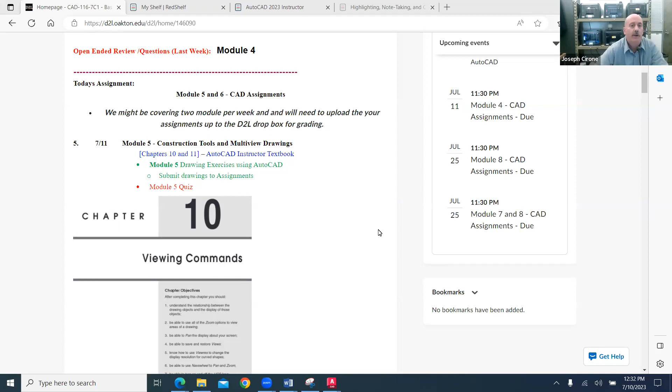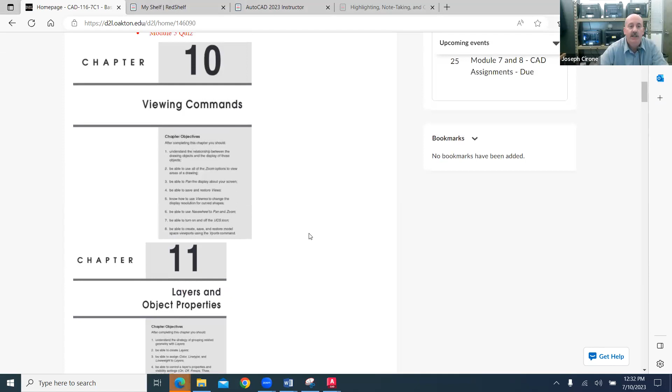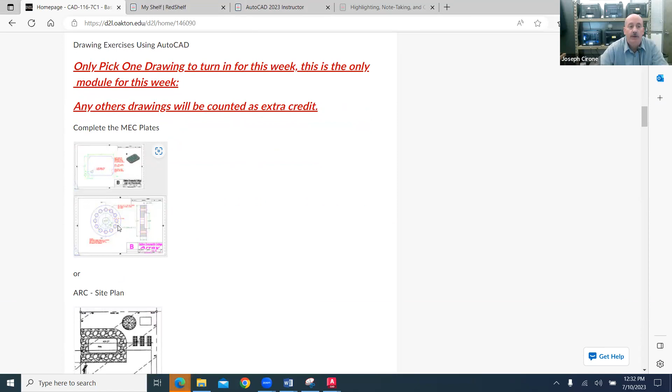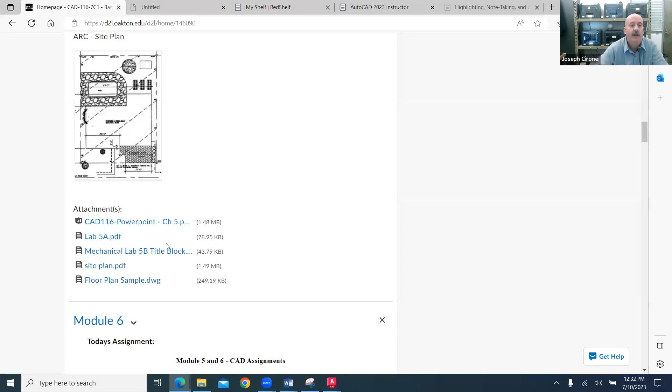Today we're going to look at Module 5, which covers Chapter 10 and Chapter 11 from our textbook. So we're going to take a look at those textbook chapters. I've also included in the main splash page the drawing assignment. You're to choose one drawing assignment, either one of these two mechanical drawings or this civil drawing. And then we have some attachments here for downloads. I've set this attachment here that'll allow us to take a look at an example that we can use for the chapter. So I'm going to download this file right here and open it.

And we have this floor plan sample that toggles with the textbook chapter. As we open that in AutoCAD, we can see that, and we can start to set up and take a look at our tabs.

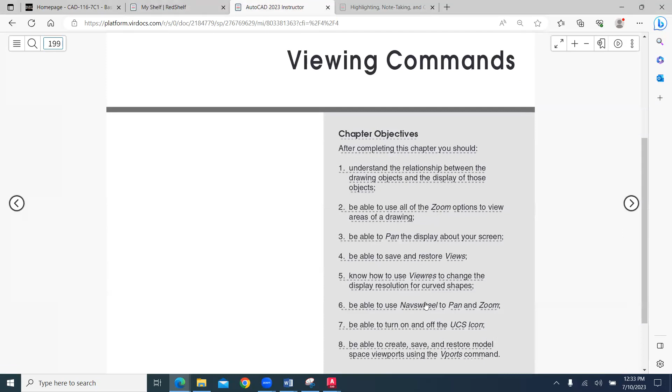We look at the chapter. We're looking at understanding the relationship between drawing objects in the display using zoom commands, pan commands, view resolution, navigation wheels. There's a lot of different ways to do things. User coordinate systems, and then being able to save and restore viewports.

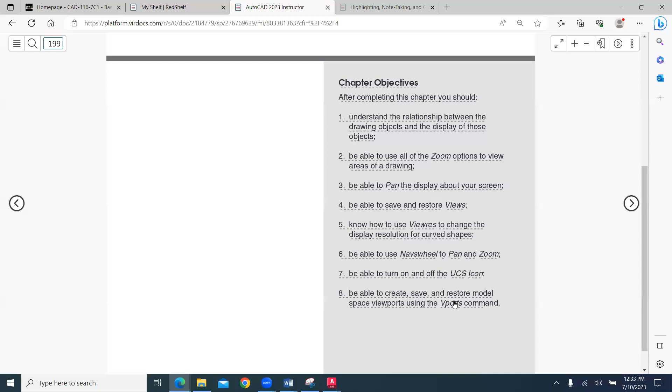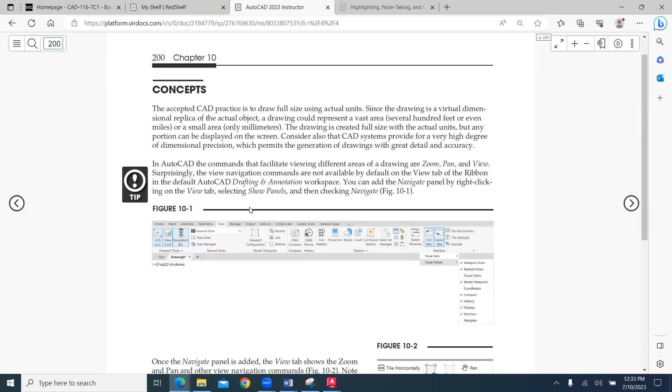The basic concept is that we create these full-size drawings that are scaled to actual units, and then we're able to see them on the CAD system. So when we look at these different drawings and we open them up, we can use the navigate panel to go through these different display commands.

So we can go to the main splash page and open this floor plan sample drawing, just as an example. Here's our floor plan sample drawing. Let's see if we can get this to fit on the screen.

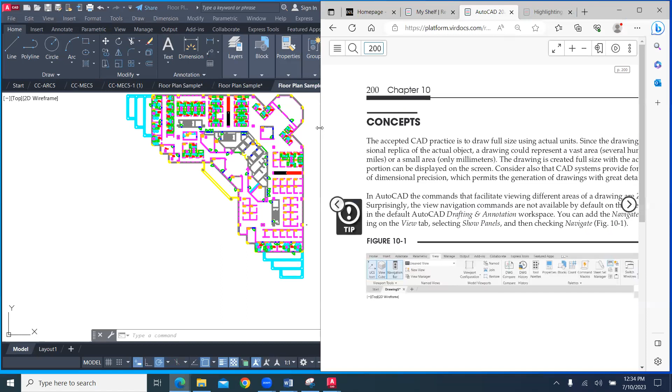So as we look at our sample drawing, the concept is that we would create the drawing full size. And if we were to go back to our CAD system, we can then check our units.

Let's enable our toolbar. So here's the menu bar. If I turn off the menu bar, show the menu bar, we'll have this menu bar here across the top. For example, if we wanted to check the format of this and we wanted to look at the drawing units, we could see that this is an architectural drawing, and the units would then be set up in feet and inches.

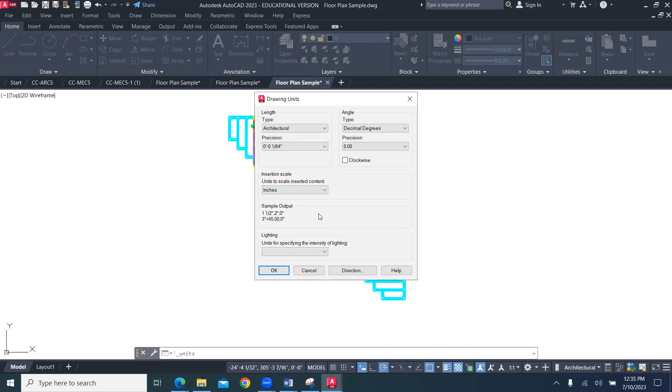We can check the navigation panel and then make sure that we have these different commands active. And that's part of getting to use AutoCAD.

And so when we look at the tabs, we have a home tab, an insert tab, an annotate tab, and a view tab. If you don't have one of those tabs on, what you do is you right click in an area and then you check to see that you have those tabs enabled. So we have our home tab, our insert tab, our annotate tab, home, insert, annotate.

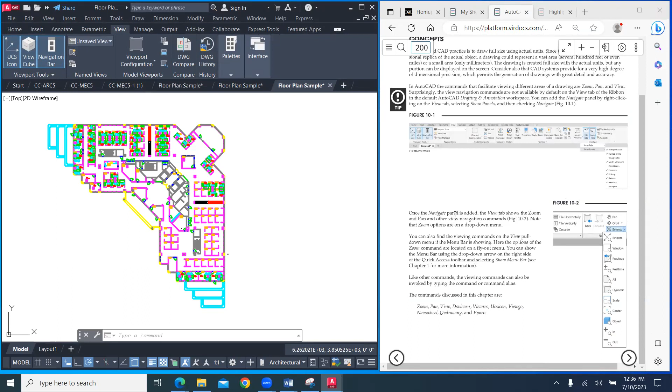And then when we're on the view tab, what we want to do is we want to make sure that we have the same tabs that are active. What they're showing here is on the tab that they have the navigate panel enabled. So to enable the navigate tab, what you do is you right mouse click and then you say show tabs, show panels, and make sure that navigate is checked off.

So now that navigate is checked off, you can then see these different commands like extents, window. Zoom extents will zoom everything that's within the drawing. Zoom window, we could use to create a little box and then zoom in on that window.

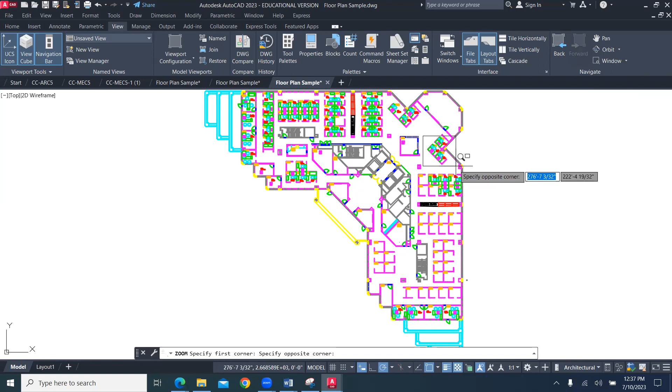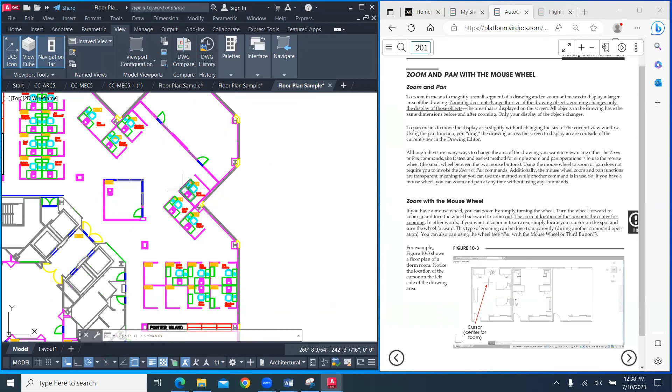The best way to zoom and pan is with the mouse. What you really want to do is get a mouse with a scroll wheel, so that'll allow you to change the zooming by just turning the wheel. They give you an example of how to zoom into a different area. So if you were looking at the floor plan, if I turn the wheel on the mouse, it'll zoom it out. If I push the wheel, it will zoom it in. It's extremely efficient to be able to go and look at the different areas of the drawing.

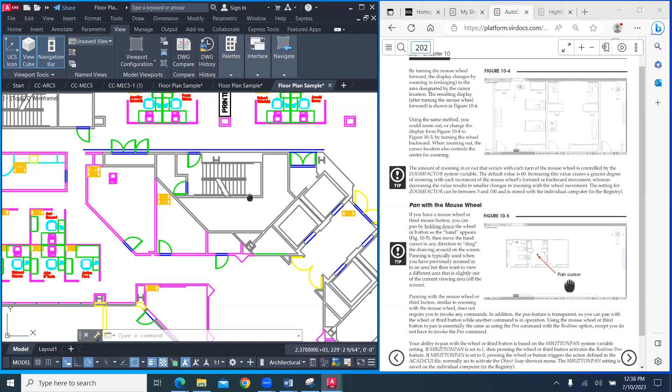If we wanted to pan with the mouse, what we do is we push the middle mouse wheel and you get the hand, and it'll allow you to look around the drawing without changing the level of magnification. So you can either be in really close and then pan around and see all these different cubicles that they have set up, or you can be farther back and look at more of the drawing.

AutoCAD has many different zoom commands, and it's a very well-established piece of software. As it developed over time, they added more and more different ways to view drawings.

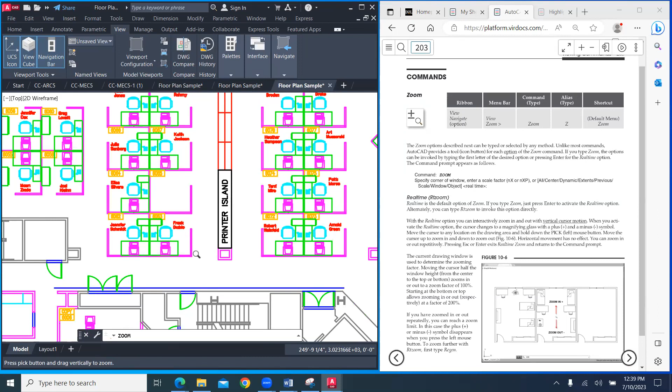Zoom real time uses the mouse to increase or decrease magnification. If you look at the view menu and select zoom real time, clicking and holding while pushing the mouse up increases the magnification level, in case you don't have a scroll wheel, or pulling down decreases it. That's real-time zooming, and it's really the best way to work with AutoCAD.

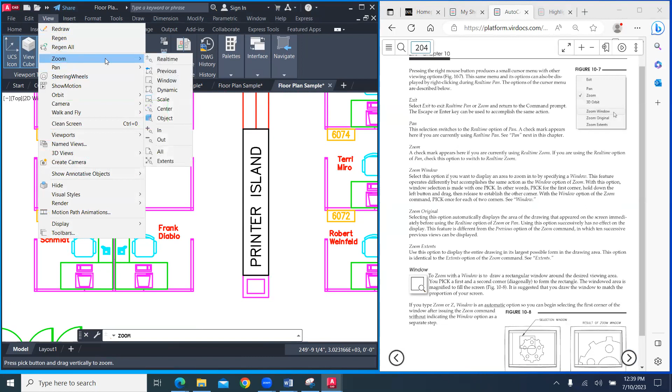Then you have things like zoom window, which is under view, zoom, window. You create a window and zoom in on that detail. You can get extremely small or extremely large as you zoom in.

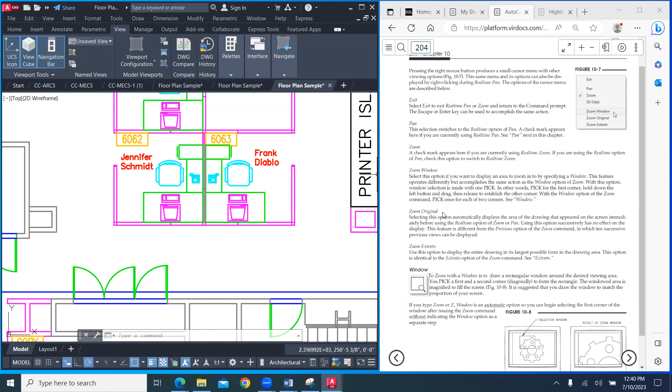You can exit out, right-click within the zoom commands, and use others like zoom window, zoom original, and zoom extents. If you go to view, zoom, extents, what you really want to use is zoom extents and zoom all, which give you the full perspective of what's available within the drawing.

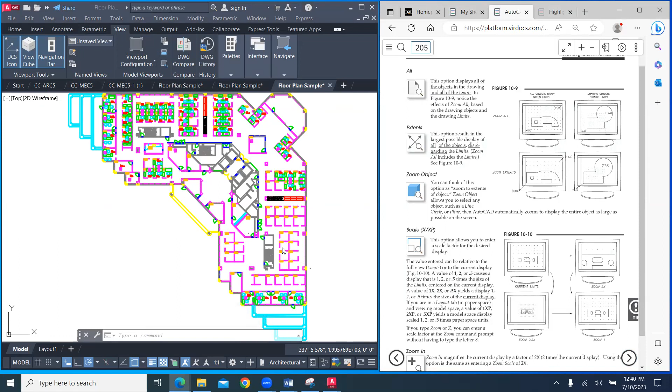You can also zoom in on objects at a set scale, but you don't really use that command so much as you would set up a viewport. It's just a command that allows you to set the display at a certain percentage.

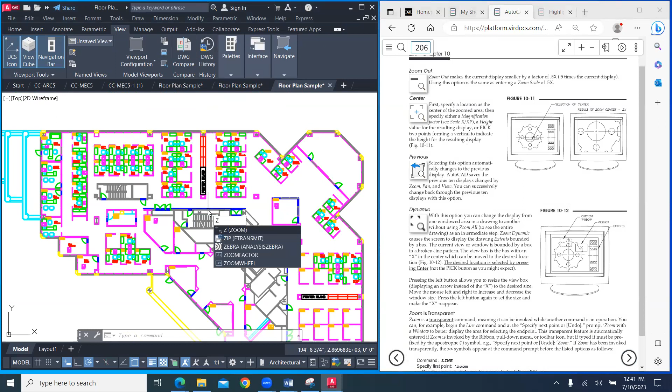Continuing through these zoom commands, there's also zoom previous. So if I was zoomed in here and then zoomed back, I could type Z for zoom and then P for previous, and it'll restore to that last zoom level.

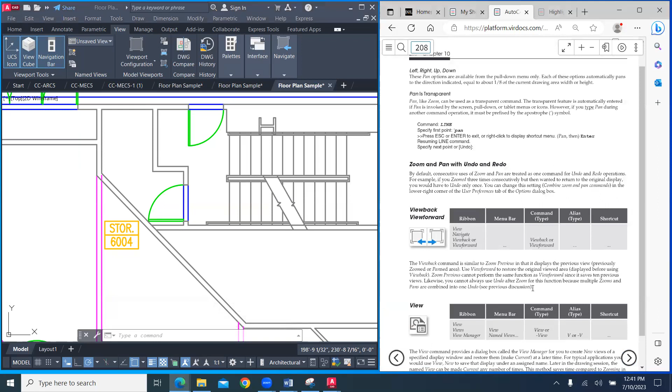You're able to use all these different zooming and magnification commands, but they pretty much all work the same. As you get into drawings, it's just a matter of navigating your way around and finding things, like in this floor plan, which may be fairly complicated.

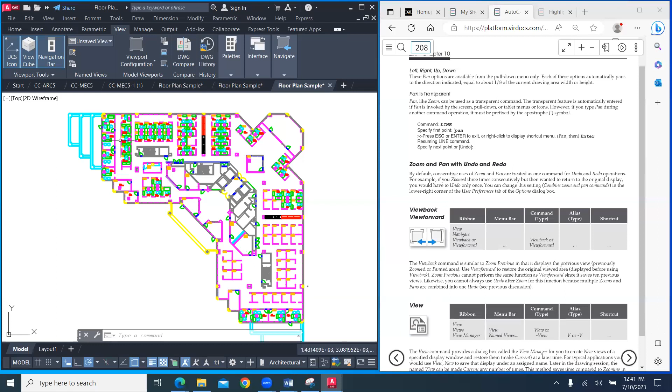Other commands you can use include the view command, where you can create a view and restore a view. For example, if I was managing a large enterprise like this and wanted to save a view, I might save it by the room number, using the view command.

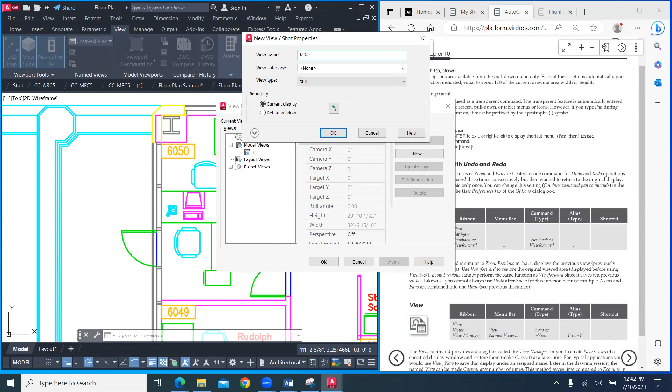I can save these views. As you work with large drawings, say I was the facilities manager for the college, I could start saving views by classroom numbers so I could quickly tell an employee, go to room 6050, and they can restore that view. I'd say new view, name it 6050, and click okay.

Then I can close this. If I had another room I wanted a view of, say 6074, I could go back to the view command again.

It looks like the first one I called number one, but I can restore these views by clicking on it and saying restore, or set the view current. It looks like it didn't do that one, so let me cancel this real quick... there we go.

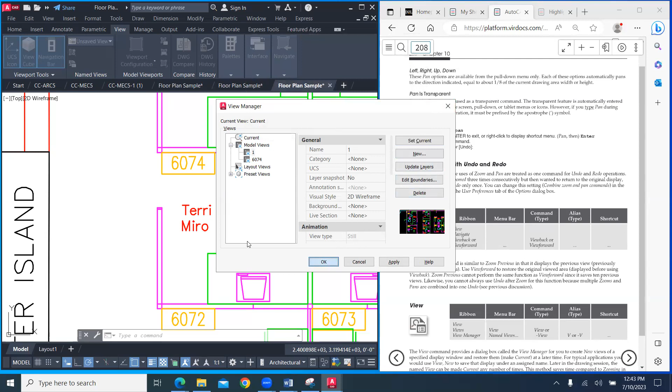Then if I go back to view, I can restore the view by setting it current and applying it.

So you can create these different ways to navigate through large, complicated drawings. This demonstrates how I did that — just creating a view after zooming into an area and saving it under a name.

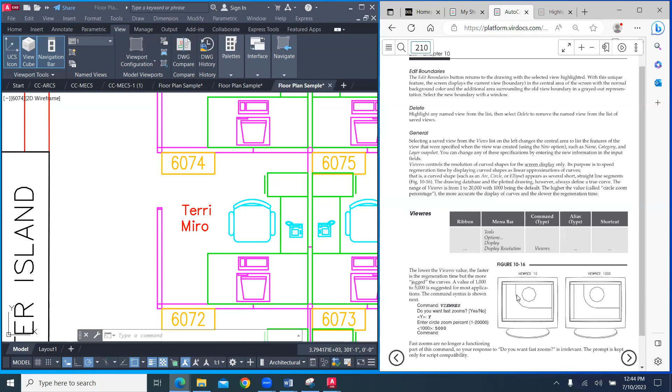Viewres is a really good command because things like circles will start to look blocky as the computer calculates out the circle's shape. The view resolution on circles can be increased with the Viewres command.

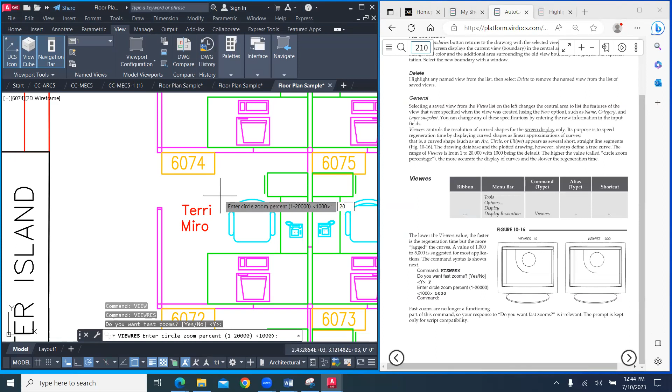Looking at Viewres, you can increase the zoom resolution based on how high the setting is. The lower the resolution, the worse it looks. If you want something that looks really great, you can crank it all the way up to 20,000 and the resolution will be a lot smoother.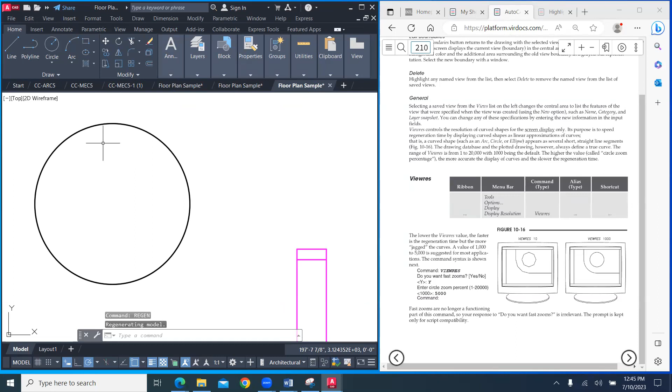For example, if I had a circle that I drew, it looks super smooth. But if I go into Viewres and dial it down to 1,000, then regen, it still looks pretty decent, but you'll get more blockiness. That's the view res command.

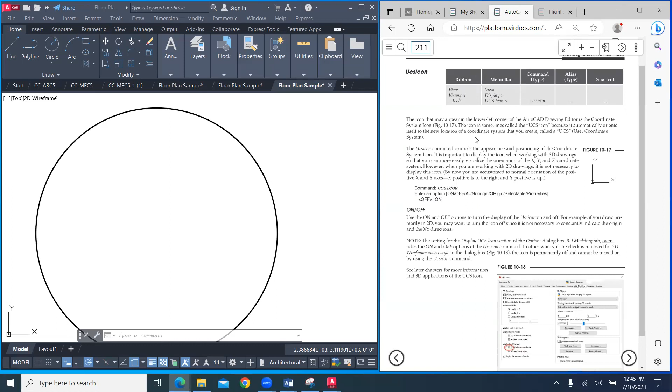That example didn't work as well as I'd hoped, but you can see what it looks like in the textbook's example. Other things we can work with include the UCS icon, the little icon in the lower left-hand corner, which you can turn on or off with the UCS icon command.

So if we zoom back here, let's erase that, and then look at the UCS icon command.

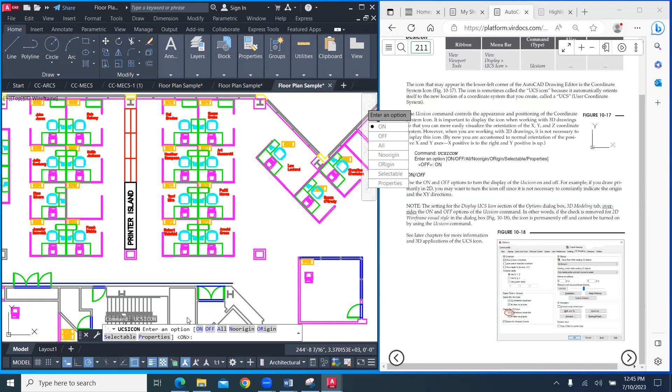When we work with the UCS icon command, we're looking at some of its properties. We can look at the style we want that UCS icon to look like, whether a 2D icon or a 3D icon, changing the size, the color, etc. And we can okay that.

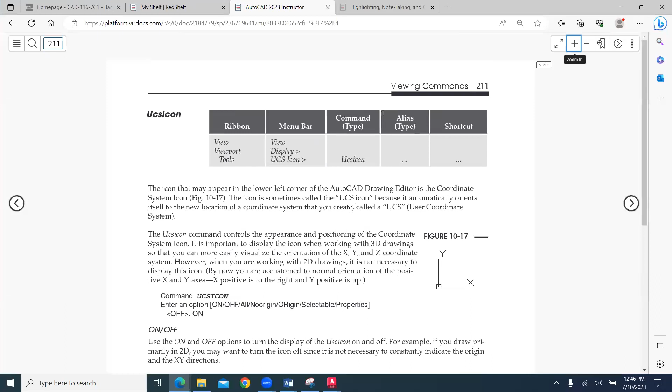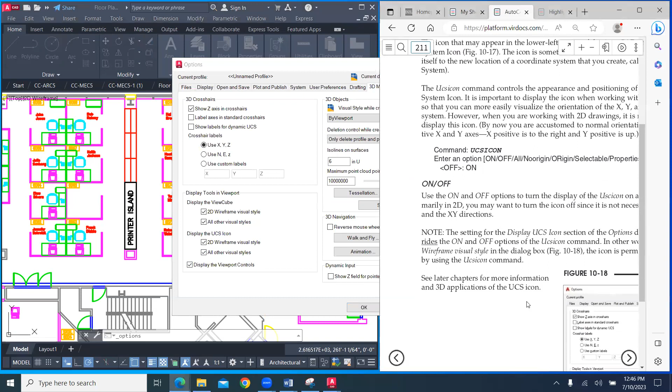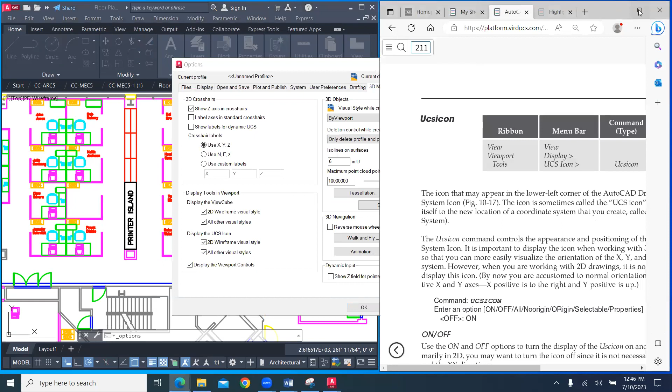This is showing what the UCS icon looks like in the settings command. If we right mouse click and go to options, then look at 3D modeling, you can see whether the UCS icon is displayed. It's on the 3D modeling tab. Here's our display of the UCS icon, and you can turn it off and work with some other options within that.

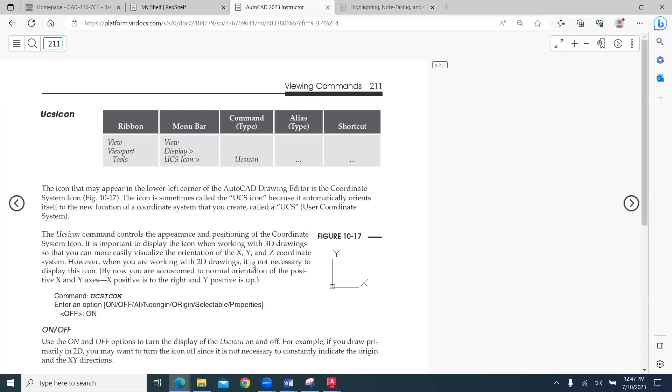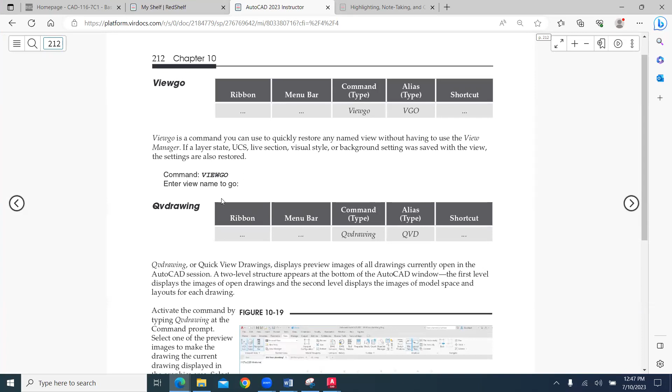All right, continuing on. View Go is the same as the View Restore command. You can restore those views with the View Go command, going to the view you wanted to save, like we did with the room numbers.

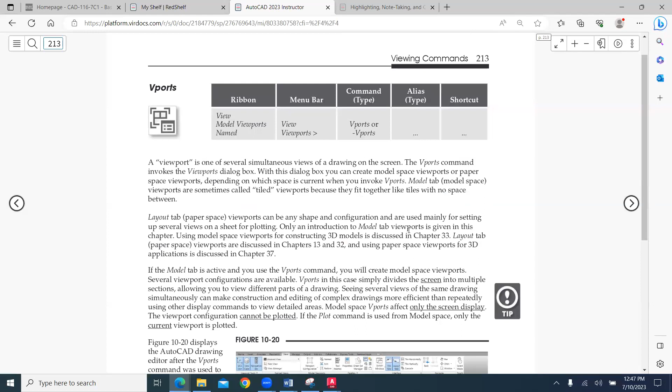Viewports is a really neat command because it works differently in paper space than it does in model space. Viewports looks really cool in model space where you can divide up the screen like this. So if I was to go back to my drawing...

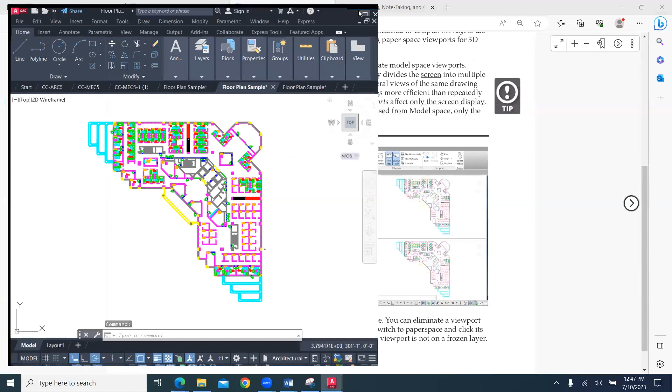While I'm in model space, say Viewports. You can set it up so that you can have 4 on the left, and you can set it up in 2D or in 3D. Let's start off with a basic 2D. So if we said 4 left, and then we would say current views, let's just okay with that.

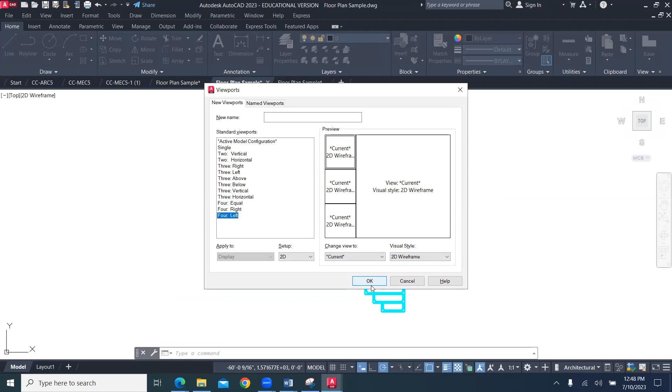Then you can double click in each of the views, and you can have different components that are shown within model space.

And then if we go back to the Viewports command, when you work with something in 3D, you can go through and change things. It's a little bit more dynamic with 3D.

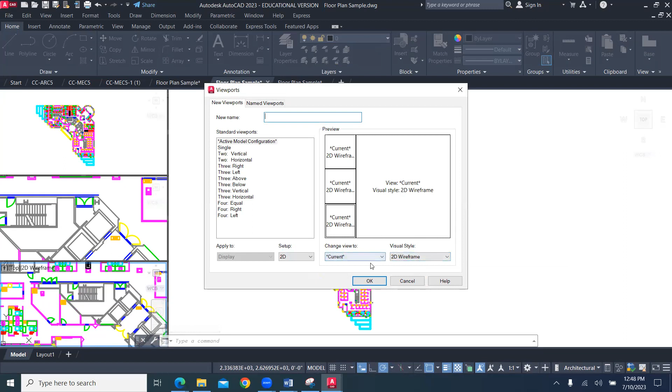So let me open up a 3D drawing. Let's see here, we have our mechanical drawings. Here's one that has some 3D applications to it. So if I modeled this, and then if I typed in Viewports, four left in 3D...

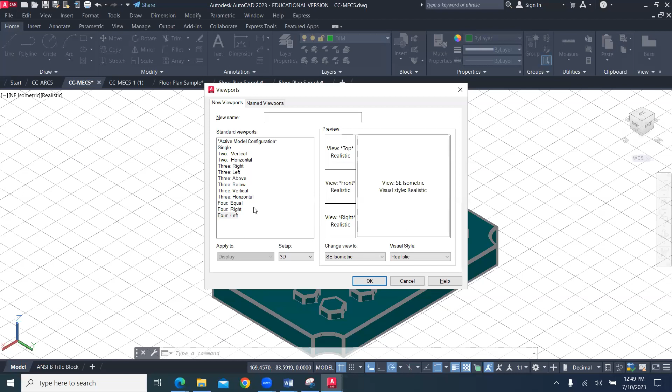Then you have a top view. You can have it set for front view, right side view, and then an isometric. You can also have the visual styles shown within each view, and these are shown with realistic views.

And then we can go through here and each viewport is active. So you can have it set up with the top view, this would be a front view, and then this would be the side view.

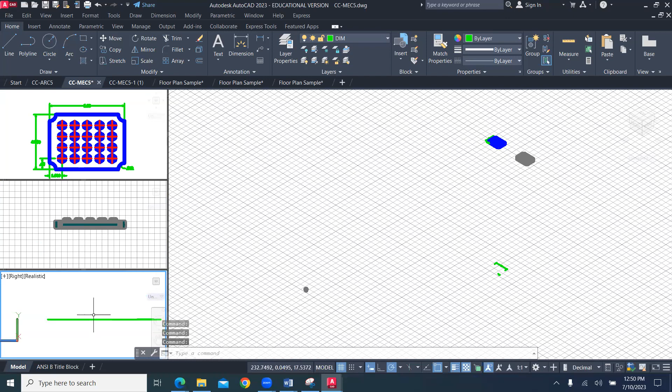It allows you to navigate through the model to see these different components within the drawing with viewports. They're really kind of neat. You can have a perspective here where you're in one view, start a line, then snap into another view and grab and create that geometry in other views. So it has some great applications for it.

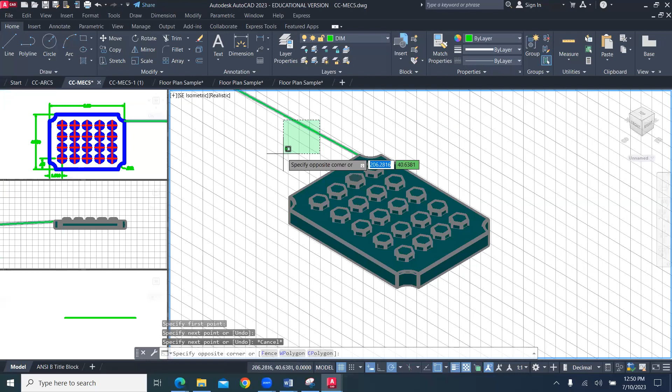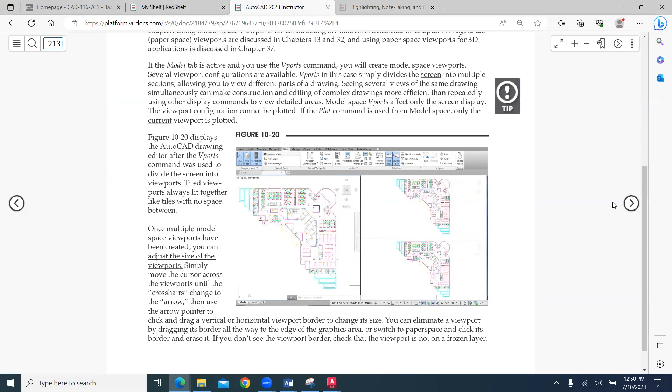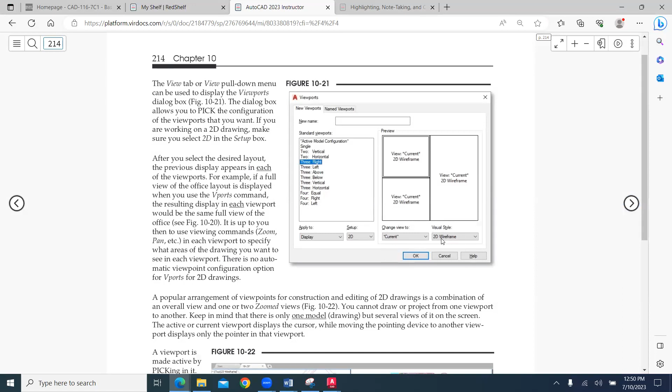But in a basic course, we're just looking at how these different view commands work. So you have viewports, and in model space you can create these different viewports, then set up what you have displayed within those viewports. You can also set whether you want them to be a visual style of wireframe or conceptual, depending on what visual style you prefer.

And that's basically where the textbook kind of leaves off. Now, if we look at that chapter in that same area of the drawing, you can also work with viewports in paper space when we work with layouts. It looks like they're going to have that in a different chapter, so we won't go into that at this point.

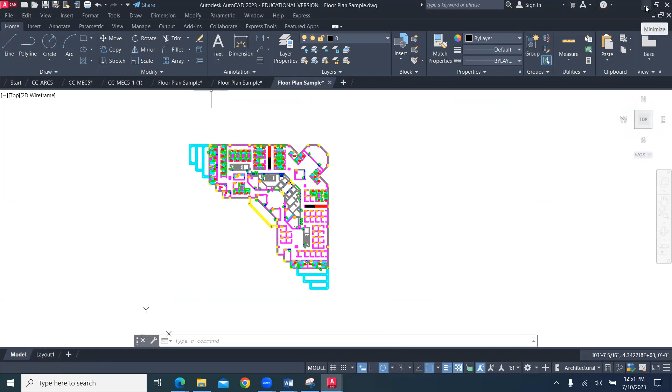So when we look at the view command in the chapter and exercises, we're looking at being able to manipulate these different drawing objects and look at them. One of the chapter exercises is to just look at the floor plan sample drawing and look at the different areas of it, being able to zoom in using zoom real time, zoom extents, etc. All righty, so as we look at the view commands, this completes our lecture on chapter 10.